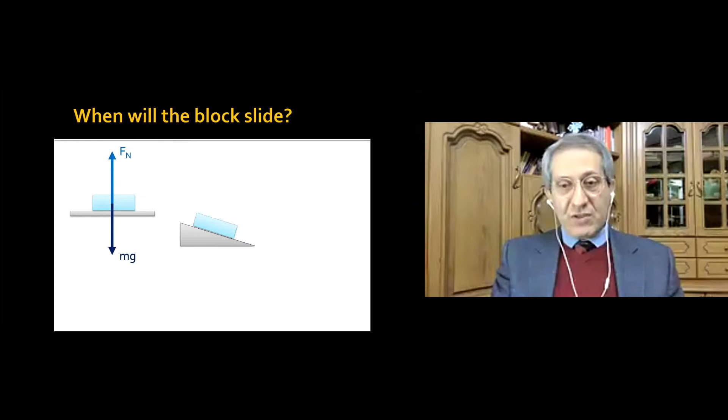If we start to tilt the surface, the force due to gravity will remain in the vertically downward direction. However, the force normal will have to remain perpendicular to the surface. To estimate this force, we resolve the force due to gravity into its components. Although the force normal will consequently become smaller, the parallel component of the force due to gravity will attempt to move the block down the slope. Being opposed by an equal and opposite force, the block remains in equilibrium. This opposing force is the force due to friction.

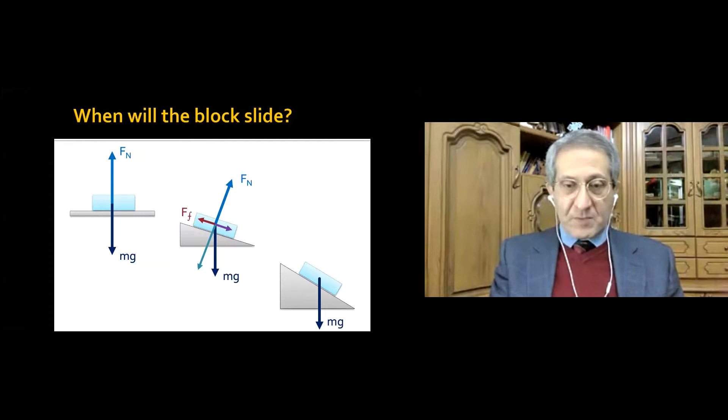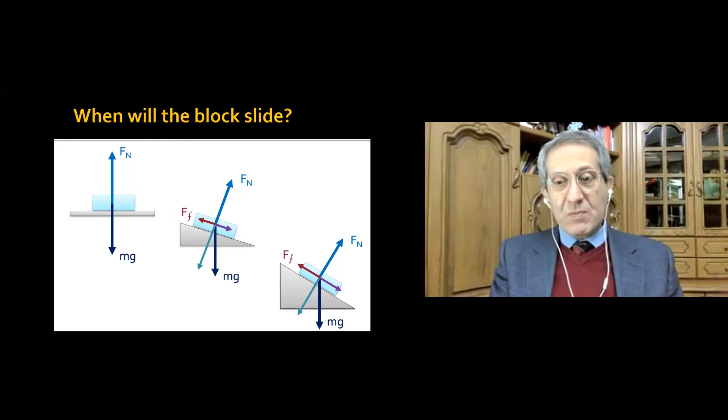The more you tilt the surface, the bigger the parallel component of the force due to gravity becomes, and hence the force due to friction would have to increase in order to keep the block in equilibrium. So, as the parallel component continues to increase, the force of friction will also increase from 0 to a maximum in order to keep the block from moving. There is going to be a point where the force of friction will not be able to resist the moving force, at which point the block will start to slide.

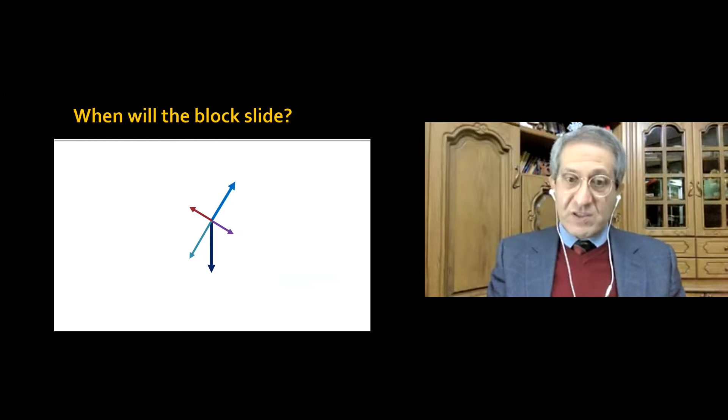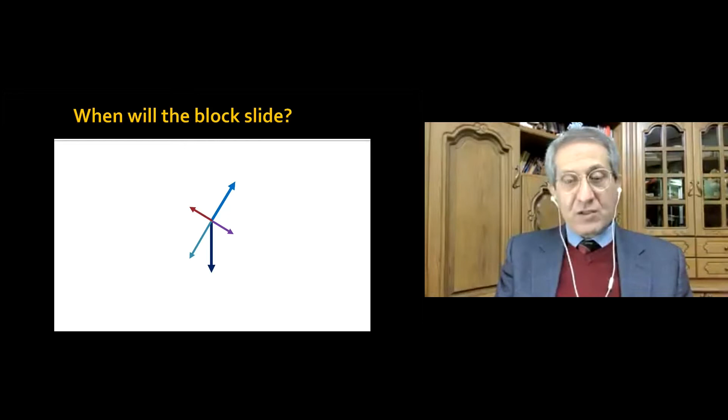It is obvious that the block will start to slide at a larger angle if the surface were rough as wood, for example, compared with a smooth surface such as glass. The force due to friction will obviously depend on the nature of the two interacting surfaces. The heavier the object, the more difficult it would be to move. Friction is therefore a force that resists relative motion between two interacting surfaces, either due to adhesions caused by surface roughness or viscosity of the shearing lubricant film between them.

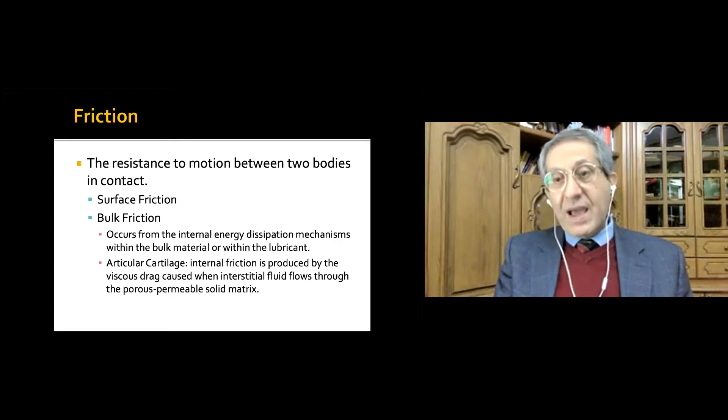There is another type of internal friction which occurs inside a material or structure and is not considered in this lecture. We have seen from the previous example that the force due to friction is proportional to the normal loads on the surface. Friction does not depend on the contact area or sliding speed of the two surfaces. Therefore, the contact area between the surfaces can be increased to reduce the pressure without increasing the friction.

The coefficient of friction, mu, indicates how much force per unit load is required to initiate sliding motion between the two surfaces. It has no units and depends on the roughness of the interacting surfaces. It takes more force to initiate than to continue sliding. Hence, the static coefficient of friction, mu s, is always larger than the dynamic coefficient of friction, mu d.

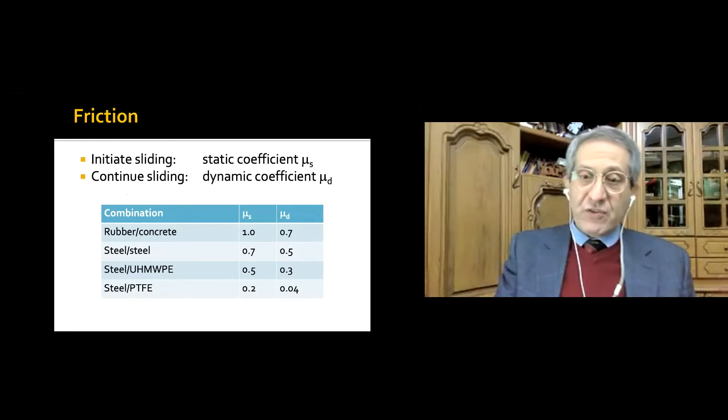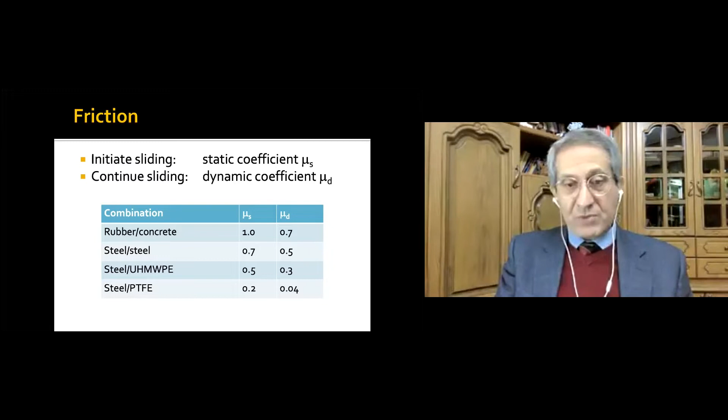The typical examples in the table indicate the coefficients of friction between your car tire and the ground, train wheels and the railway, metal on polyethylene, and metal on Teflon, which is PTFE. Given its low coefficient of friction, it is no wonder that Sir John Charnley chose Teflon to make his early acetabulum cups. The disadvantage of Teflon will be explained later.

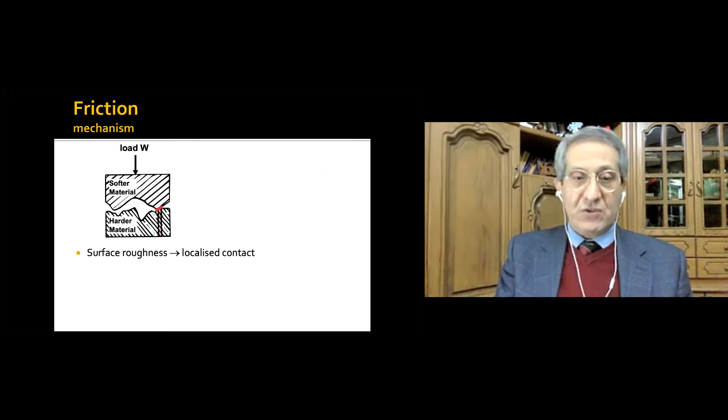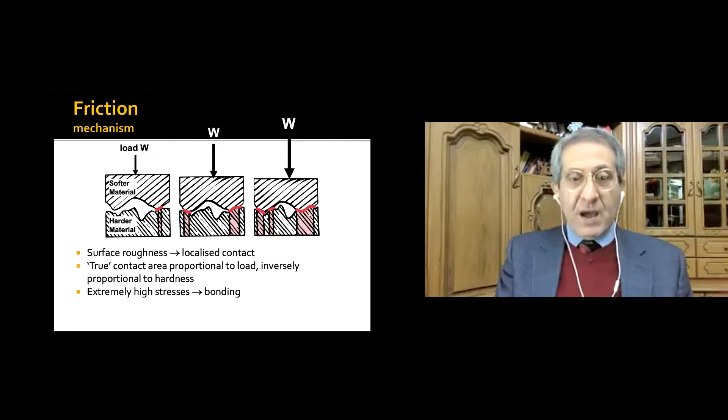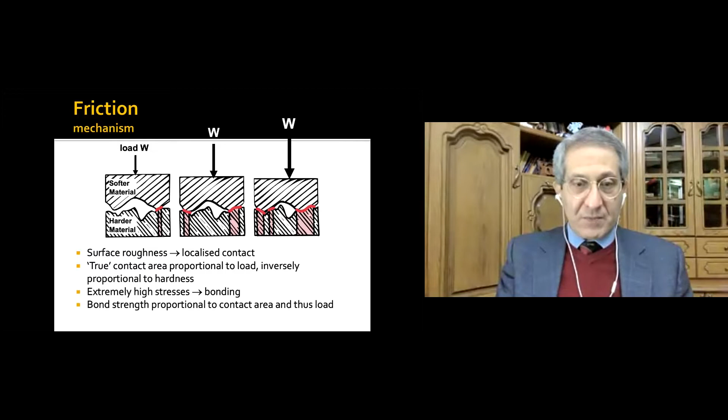Since no surface is perfectly smooth, areas of surface roughness, alternately called asperities, result in localized contact between any interacting surfaces. The true area of contact is therefore proportional to the normal load and inversely proportional to the hardness. Under very high stresses, the summits of the asperities bond together, the bond strength being proportional to the true contact area. Based on what we have learned so far, consider this question.

Assuming a similar combination of interacting blocks and surfaces, which block experiences more friction? Please vote.

We'll leave that for a minute and see how many will get it correctly. Most of you are doing that as we speak now. 50% of participants have voted. Keep them coming. Come on, guys. It's easy. We'll leave it up to a minute, so another 15 seconds. Right, can we show the answers, please?

Yes, that's absolutely brilliant. The block in figure C is obviously larger than the other two blocks. Since all blocks have a similar material, its mass is bigger, hence the normal load, which is proportional to friction, will be larger. Coefficient of friction is the same for any two combinations of materials. The surface area does not affect friction, which depends on the true contact area and hence the normal load.

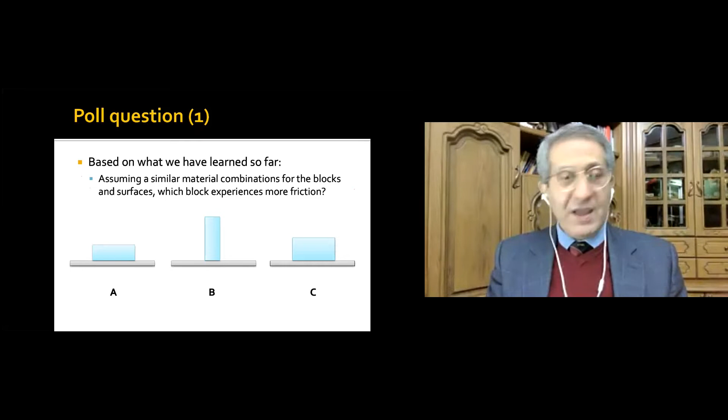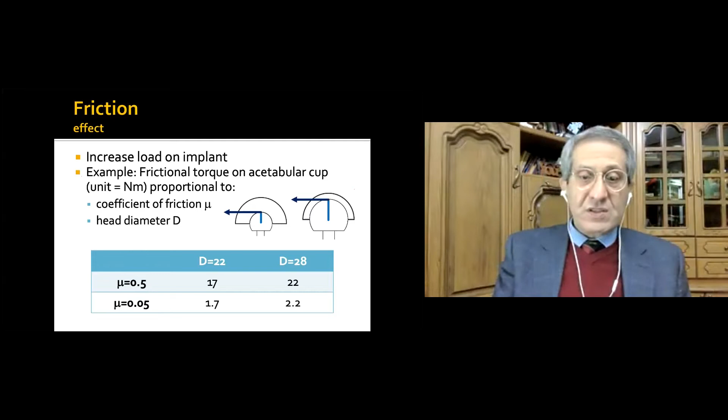In addition to causing wear of the moving surfaces, friction increases the load at the bone implant interface, which might result in loosening. Friction force itself is proportional to normal load on the implant and does not change with different femoral head sizes. On the other hand, frictional torque on the acetabular cup, which is proportional to the coefficient of friction of the articulating surfaces as well as the head diameter, increases with the larger femoral head size.

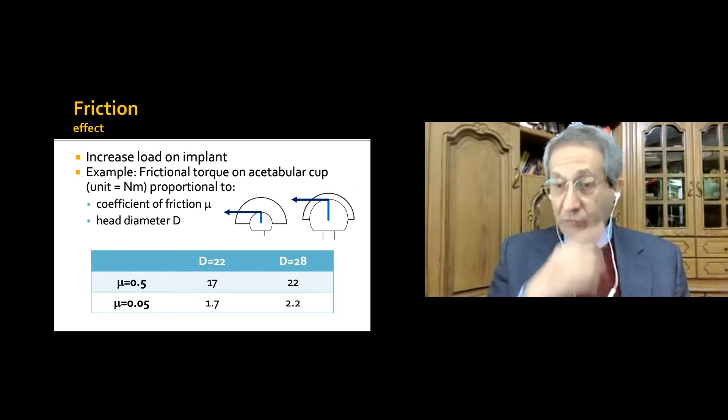Figures in the table show why Sir John Charnley elected to make his femoral heads as small as 22 millimeters. At the bottom row, the advantage of initially selecting Teflon with a very low coefficient of friction in combination with a small femoral head is clear.

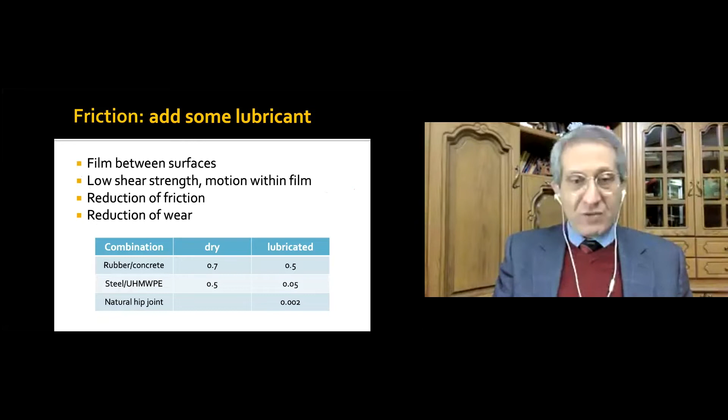We have so far considered the principles of dry friction. The addition of a fluid between the two surfaces with its low shear strength results in motion within the film, hence reducing friction and wear. We have all experienced how the car tires skid on a wet road during rain. Although the coefficient of friction in artificial joints is markedly reduced in the lubricated state, it is still nowhere near that of the natural joint.

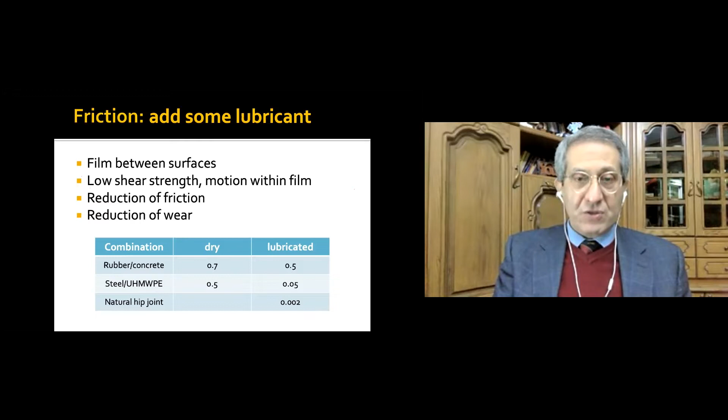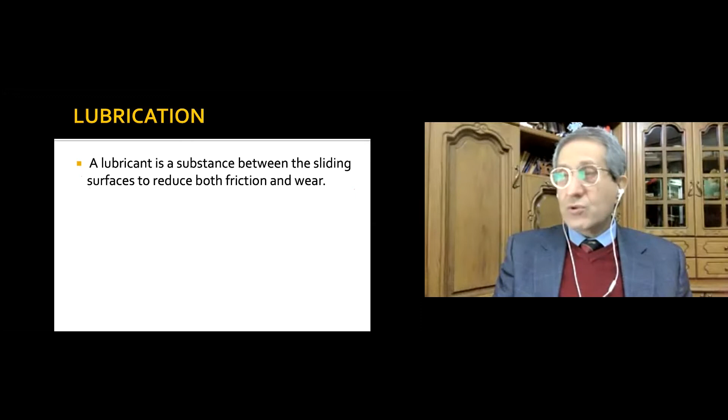This brings us to the topic of lubrication. A lubricant is a substance introduced between the sliding surfaces in order to reduce friction and wear. It could either be a solid, liquid, or gas. Interacting surfaces need to slide relative to each other at a reasonable speed in order to maintain an adequate fluid film. This is much like water skiing.

When the skis are initially stationary, the skier tends to sink in the water under her weight. However, once the boat starts to pick up speed, she is kept floating by the velocity of the boat and the viscosity of the water.

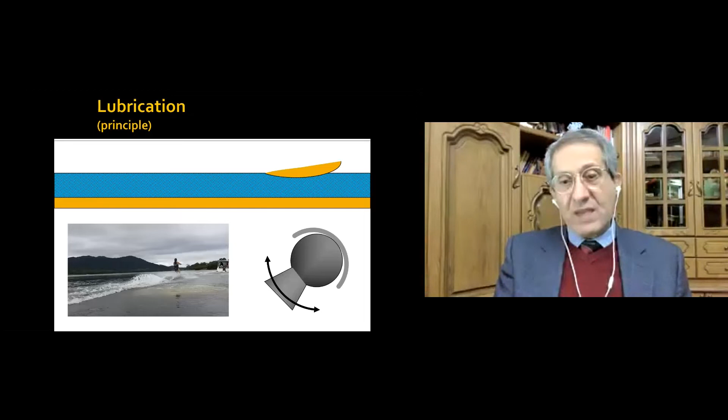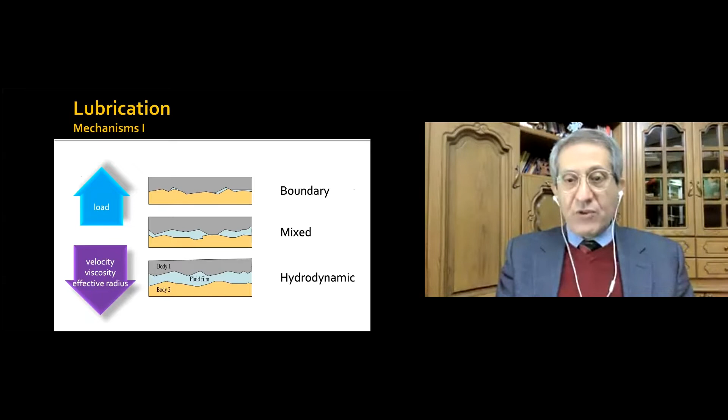The slope of the ski is represented by the clearance between the acetabular cup and the femoral head. At both ends of the spectrum, we have the two surfaces either in contact with each other, being covered only by a very thin film of fluid, or completely separated from each other by an uninterrupted fluid film. Increasing load will shift the conditions towards boundary lubrication, while increasing the velocity of motion, viscosity of the fluid, or effective radius would foster hydrodynamic lubrication.

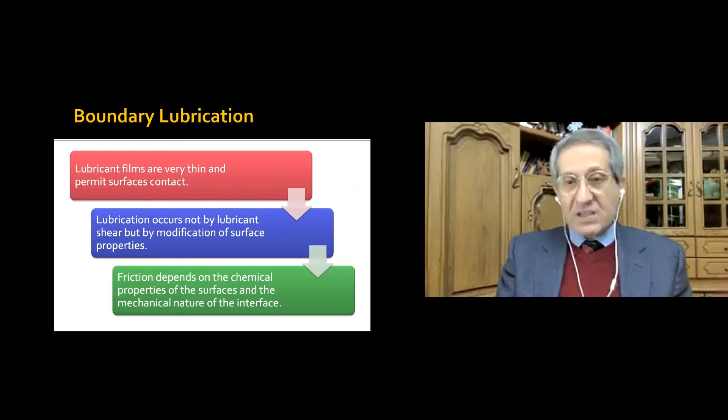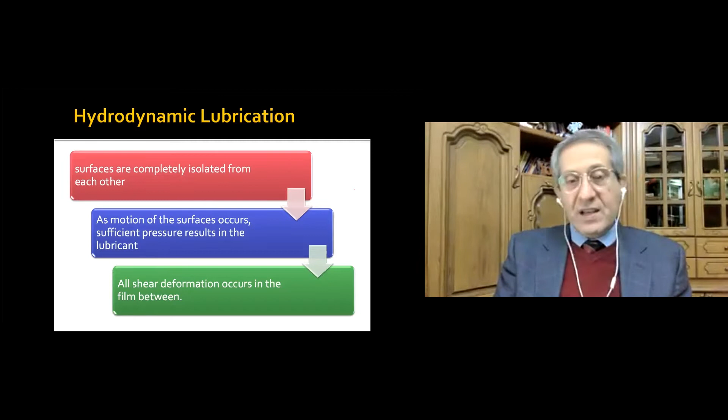When the fluid film between the interacting surfaces is about the same thickness as their surface roughness, asperities on the opposing surfaces get in contact, resulting in a high coefficient of friction. On the other hand, fluid film completely separates the interacting surfaces in hydrodynamic lubrication, such that any motion occurs between the layers of the fluid film.

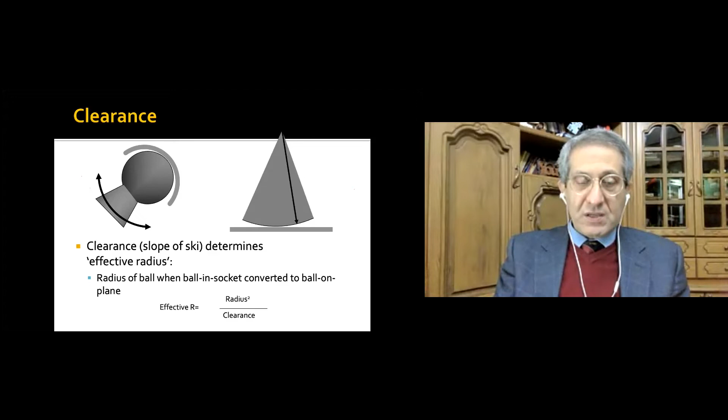The slope of the ski in the water skiing example represents the radial clearance of the implants. This is the degree of mismatch between the radius of the femoral head and the acetabular cup. Clearance determines the effective radius, which in engineering terms is the radius of the ball when the ball in the socket is converted to a ball on plane.

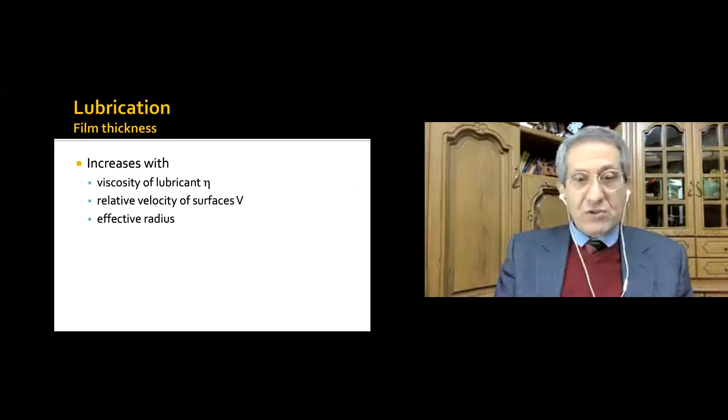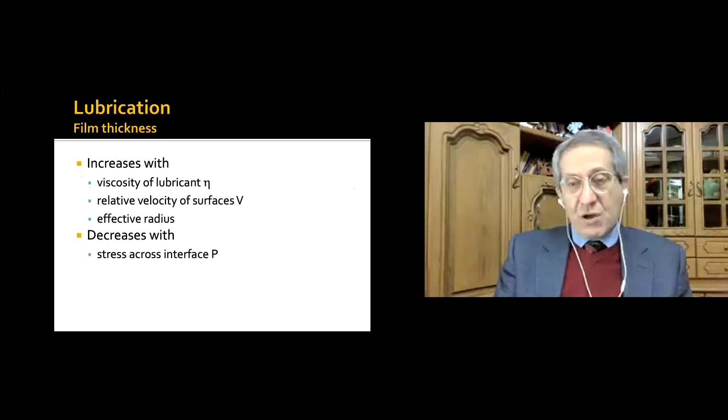The fluid film thickness depends on multiple factors. As in the example of the water ski, it increases with the increase in the viscosity of the lubricant, the relative velocity of the surfaces, and the effective radius. The fluid film thickness decreases with the stress across the interface. Contrary to friction, which is independent of the contact surface area, lubrication of the larger head is much better than that of a smaller femoral head. The above factors describe what is called Sommerfeld number or the film factor.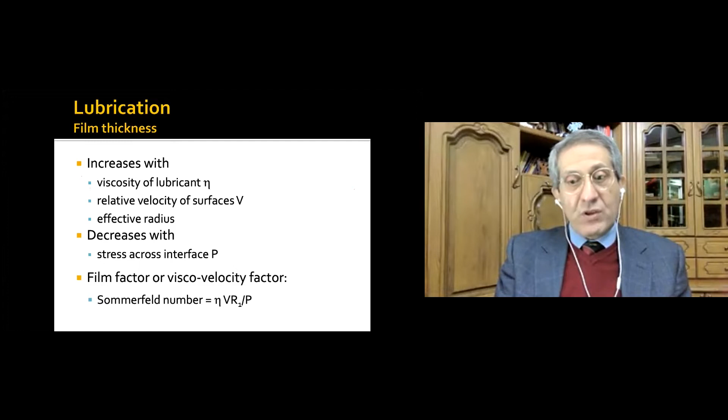Because of the surface roughness of polyethylene, hard-on-soft articulations like metal on poly can only have boundary lubrication. Hard-on-hard articulations, on the other hand, experience mixed and fluid film hydrodynamic lubrication.

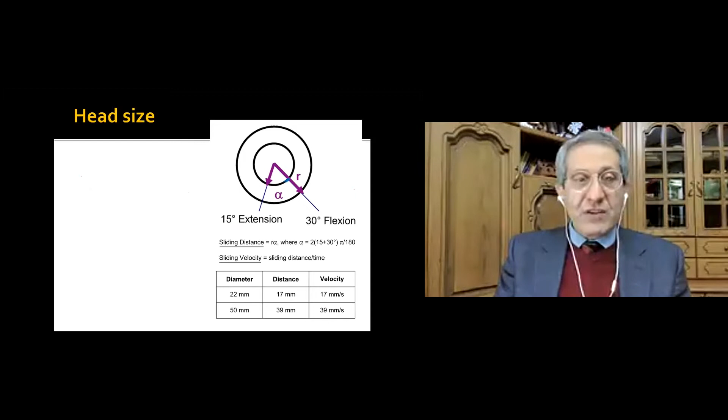In order to move from 30 degrees of flexion to 15 degrees of extension, a small femoral head would have to travel a short distance to cover its 45 degrees angle. A larger femoral head, in contrast, would have a larger sliding distance to cover in the same range of motion in the same time. Although the larger head has an advantage in terms of better stability and range of motion, because of the larger sliding distance, it also has an increased wear rate.

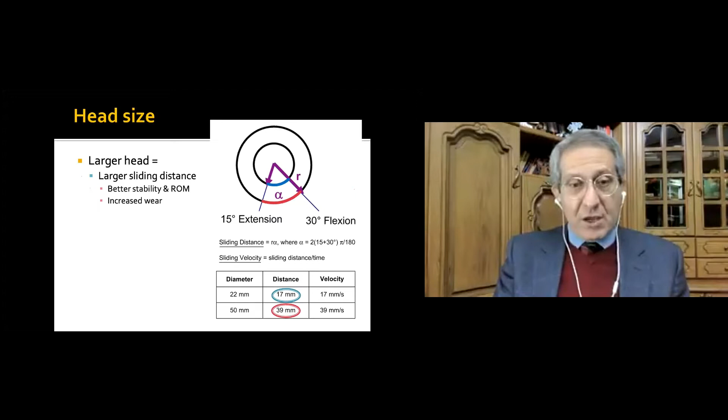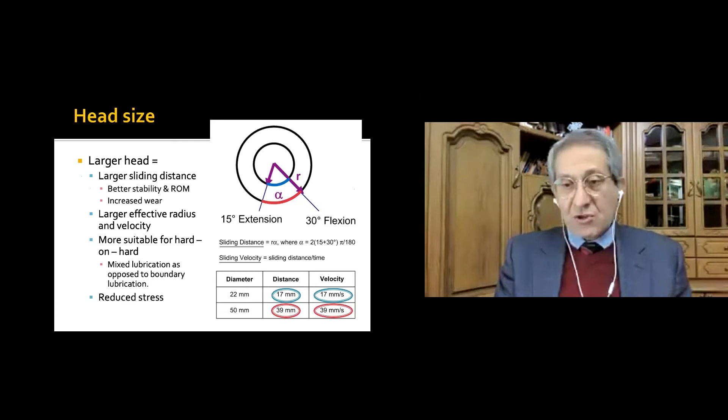On the other hand, because of the larger effective radius and high velocity, the larger femoral heads are more suitable for hard-on-hard articulations where mixed and fluid film lubrication occurs. This advantage is not experienced by the hard-on-soft articulations, which can only be lubricated by boundary lubrication. Another advantage of the larger heads is the reduction of stress due to a larger area of contact, thus enhancing fluid film thickness.

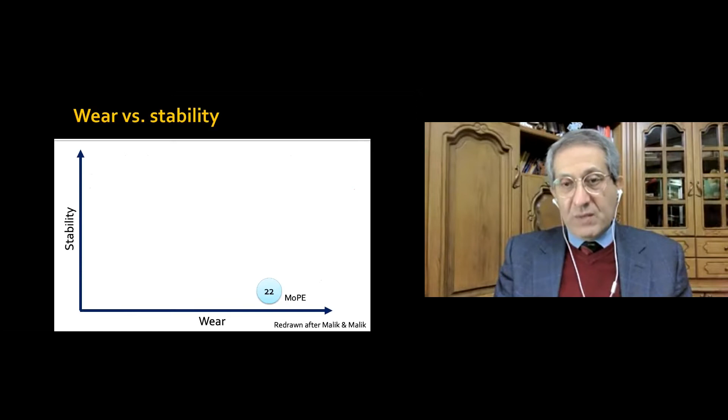The initial combination Sir John Charnley used, a 22 millimeter head with metal on polyethylene articulation, resulted in high wear and less stability. Increasing the head size to 28 millimeters increased the stability at the expense of wear. Changing the articulation into highly cross-linked polyethylene has definitely reduced wear rate. Increasing the head size to 36 millimeters proved to be a reasonable compromise. On the other hand, hard-on-hard articulations have shown reduced rate of wear. Using a larger head in this type of articulation definitely increases the stability without affecting wear very much.

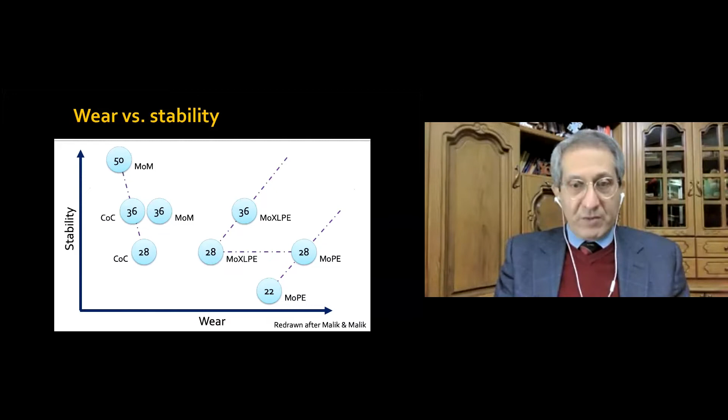With our knowledge about lubrication so far, I would like you to think as to which mechanism was related to failure and device recall in the case of the ASR hip resurfacing. Please vote.

Right, it's taking a little bit of thinking this time. And a fair share between the options. Keep them coming, guys. We're now half time.

I'm glad I had brought this question. Right, another 5 seconds, and we'll stop the poll and share the results. It's an even share between options. Let's explain the question a little bit at a time. The correct answer is B.

The ASR acetabular cup had an inside groove against which a surgeon pressed a tool to implant the component. The groove limited the surface area inside the cup. As a result, the ball was more likely to strike the cup's edge, causing wear and generating metallic debris. This was particularly prone to occur when the cup had a more open inclination.

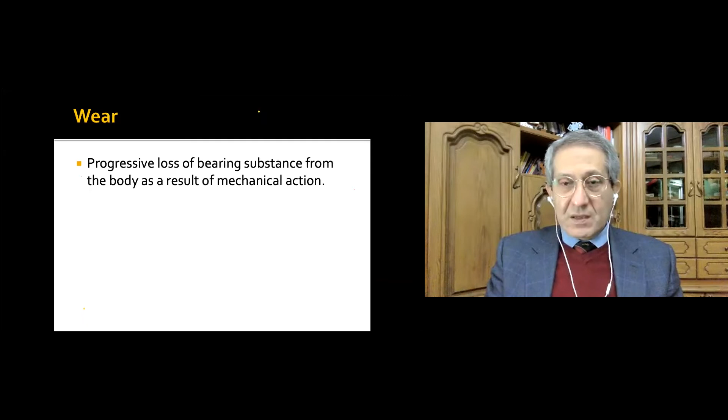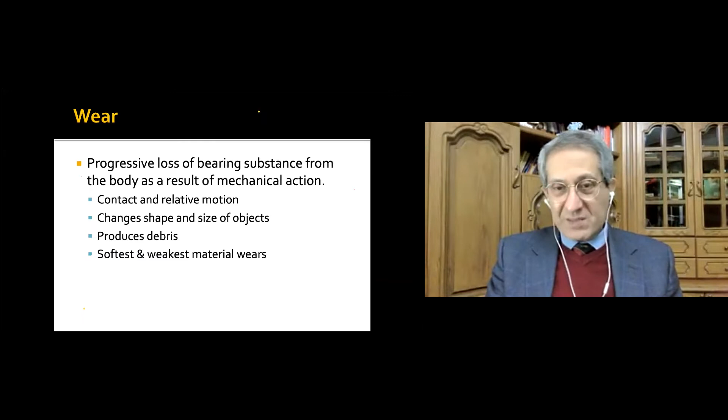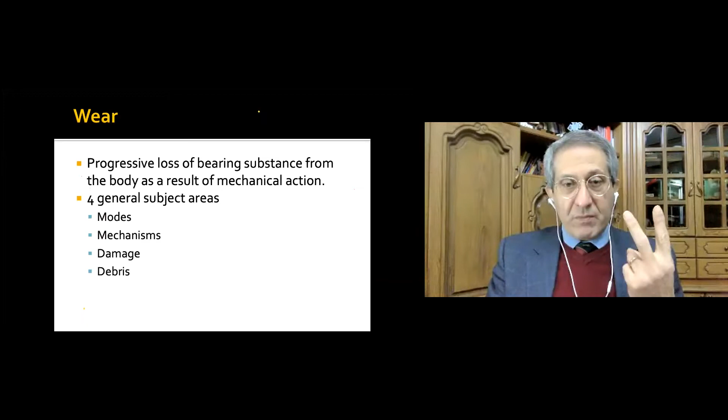That brings us to the discussion on the topic of wear. Wear is the progressive loss of material as a result of relative motion between articulating bodies. It results in a change in the shape and size of the objects and produces wear debris. As in the program Weakest Link, it is the softest and weakest material that usually suffers the most. There are four general subject areas in relation to wear: wear modes, wear mechanisms, wear damage, and wear debris.

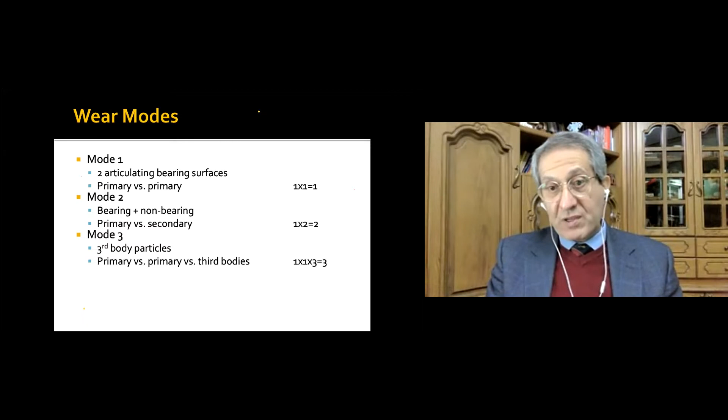In mode 1, wear occurs between two primary articulating surfaces. Remember, primary versus primary is 1 times 1 and is equal to wear mode number 1. In mode 2 wear, a bearing and a non-bearing surface are rubbing against each other. Mode 3 occurs as a result of third body particles, and mode 4 occurs between two non-articulating surfaces. Remember, secondary versus secondary, which is 2 times 2 equals 4.

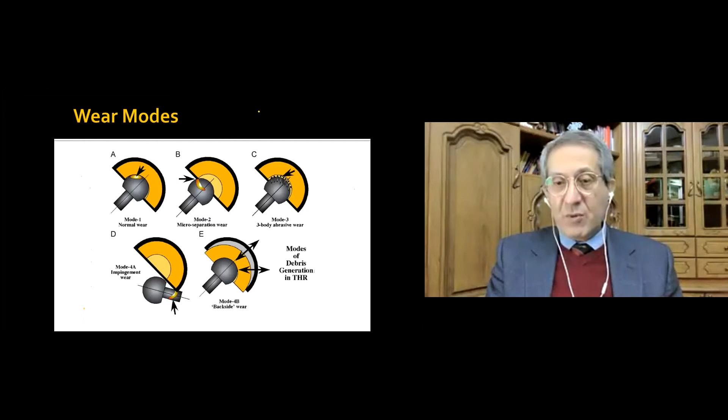Examples include mode 1 normal wear that occurs between the femoral head and the acetabular liner. Mode 2 is represented by microseparation and stripe wear between the femoral head and the non-articular edge of the acetabular liner. Mode 3 is the third body abrasive wear, abrasive wear, and mode 4 here represented by impingement between the femoral neck and the edge of the cup, or the backside wear between the liner and the shell.

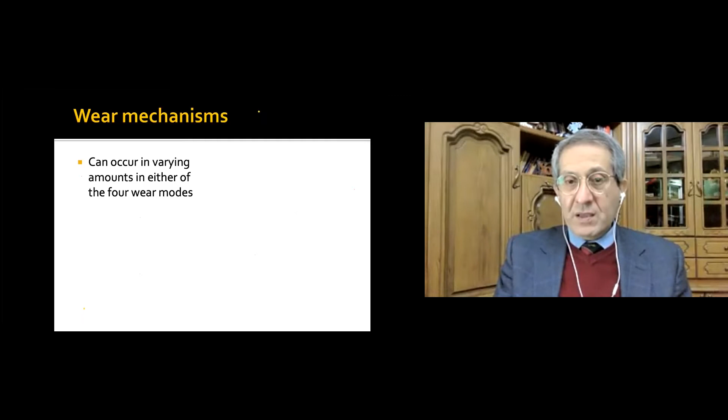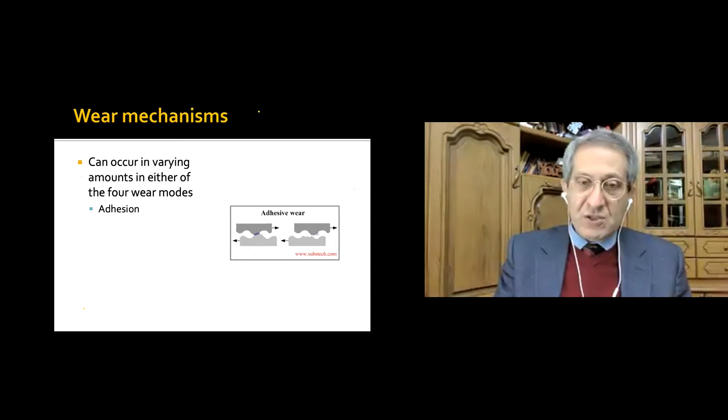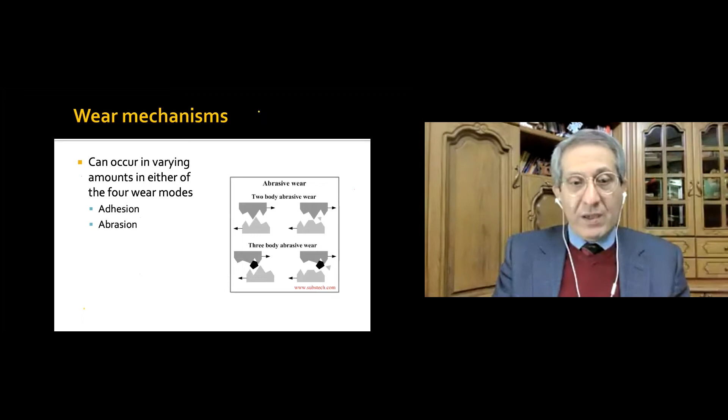The previous wear modes can occur because of any combination of the following mechanisms. Adhesive wear results from the formation of spot welds between the two surfaces with subsequent breakage of the transfer film, resulting in third body particles. Abrasive wear is like using sandpaper, where asperities on the harder surface cause plowing of the softer one. Fatigue wear results in subsurface cracks, which eventually communicate, causing delamination.

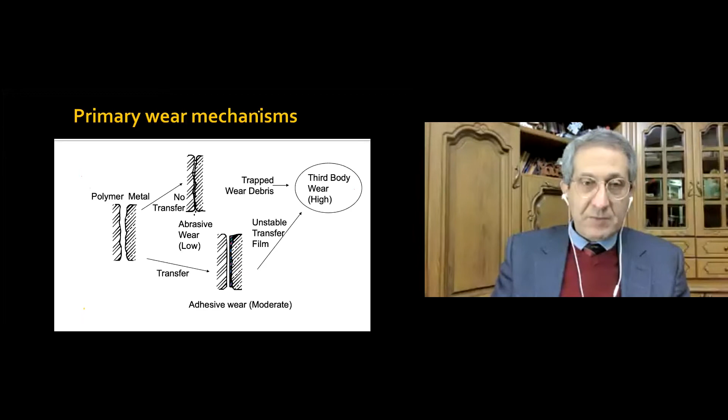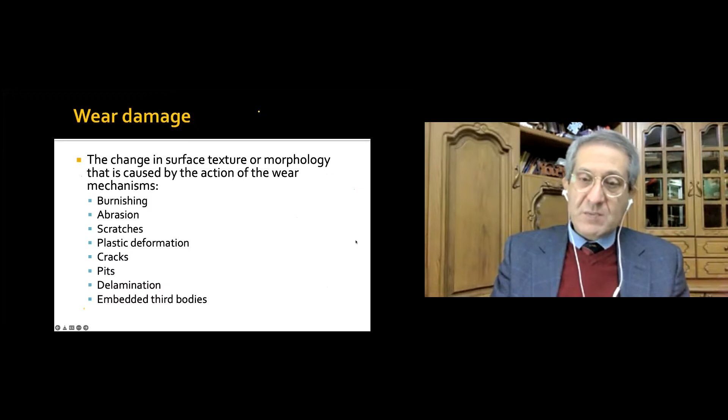Thus, the primary wear mechanisms can either result from low-rate abrasive wear, which does not involve transfer of material from one surface to the other, adhesive moderate-rate wear, which results in transfer of material from the softer surface to the harder one, or high-rate third body wear. Adding corrosive wear to any of the three mechanical wear mechanisms results in marked acceleration of the process. The above mechanisms result in change in texture or the shape of the implant. The resultant damage has been expressed by a long list of descriptive terms.

Wear generates billions of particles which initiate biological reaction. Local effects depend on the size and number of particles, either macrophage activation leading to granuloma formation or lymphocytic reaction resulting in pseudotumors. The smaller metal ions could escape into the systemic circulation, resulting in carcinogenesis or teratogenicity.

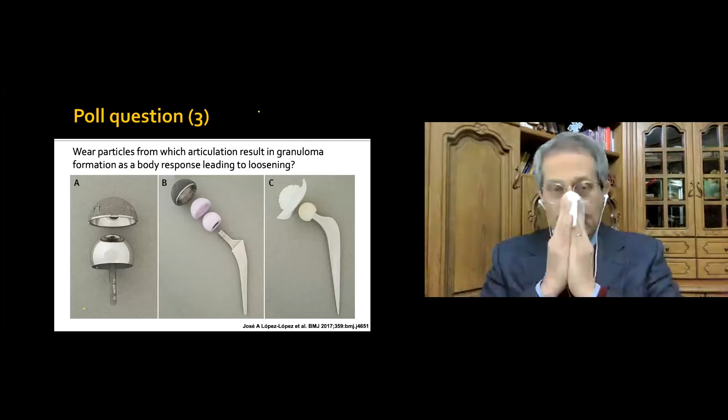Here is another poll question. In which articulation do wear particles result in granuloma formation as a body response, leading to osteolysis? Please vote. Another 30 seconds, sorry. Keep the votes coming. So granuloma as in macrophage activation rather than lymphocytic reaction, which occurs with a certain kind of articulation. I'm trying to make it easier. That's the effect of prompting in the exam. Right, another second. Okay, now we'll stop sharing and share the results.

Now, I'm disappointed a little bit with this result. Indeed, the correct answer is C, where the polyethylene particles are known to cause macrophage activation and granuloma formation with osteolysis. Metal-on-metal articulation in figure A usually results in lesions such as pseudotumor, ALVAL, or ARMD, while ceramic-on-ceramic articulations are biologically inert.

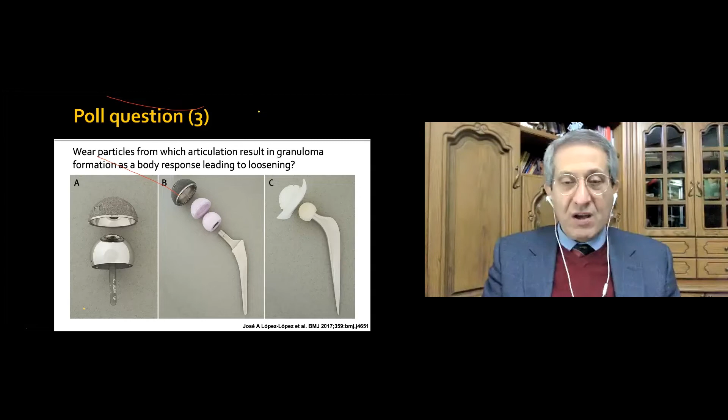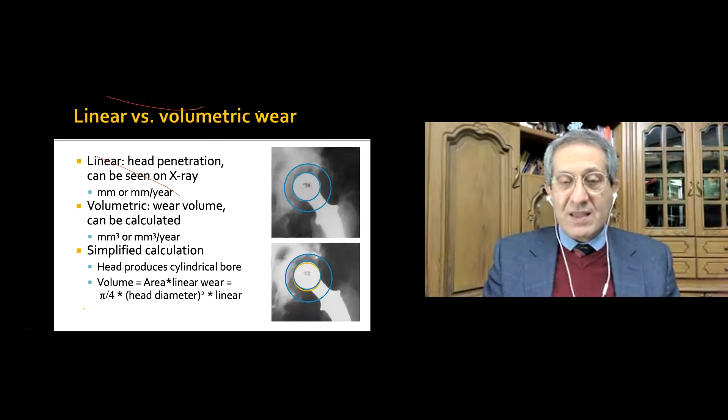Linear wear can be measured on X-ray or other special techniques by head penetration in millimeters or millimeters per year. Volumetric wear is measured or calculated in cubic millimeters or cubic millimeters per year using a simplified equation, assuming that the head produces a cylindrical bore.

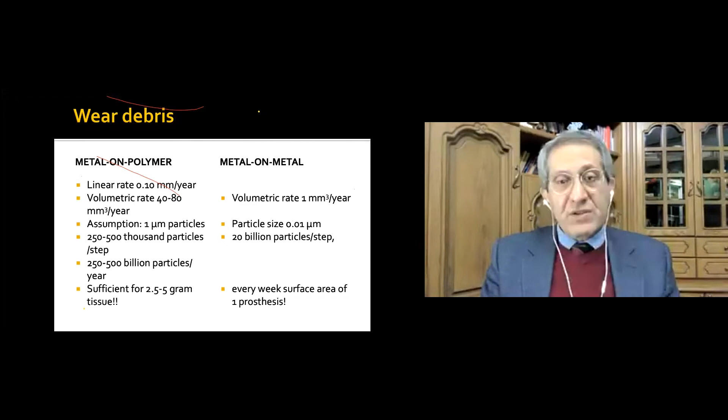Many of you will be familiar with this illustration, which shows how much wear volume is produced by different combinations of bearing surfaces. It is, however, the size and number of particles which determines the biological effect of the wear debris. Although the volumetric wear is much less in metal-on-metal articulations, particle size is much smaller, sub-micron, resulting in billions of particles being produced with each step.

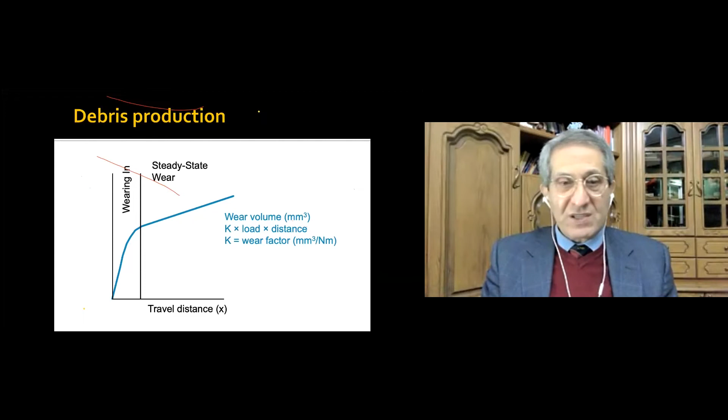Debris production is initially accelerated in the initial wearing-in phase. However, it later reduces and reaches a steady state. Wear volume is directly proportionate to the normal load, and not the stresses, and the sliding distance that the articulating surfaces experience. It is inversely proportionate to the hardness of the softer component.

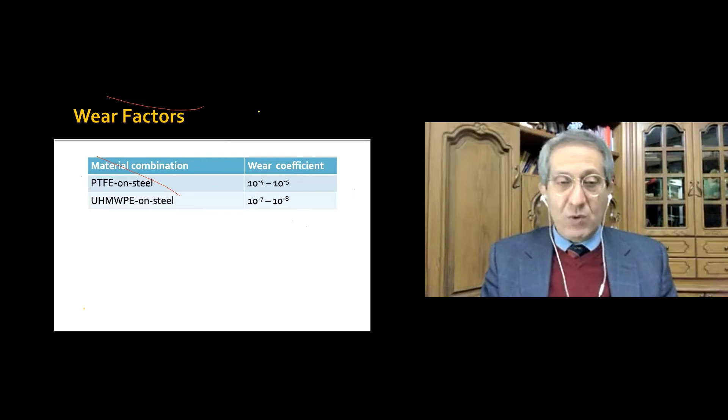Using this information, one can calculate a unitless wear coefficient as well as a more specific wear factor. This is where the disadvantage of Teflon becomes clear. Its wear coefficient is far above that of metal on polyethylene. This explains Charnley's decision to move from Teflon cups to polyethylene ones, which we nowadays use. Ceramic-on-ceramic articulations are by far the best ones at present in terms of wear factor.

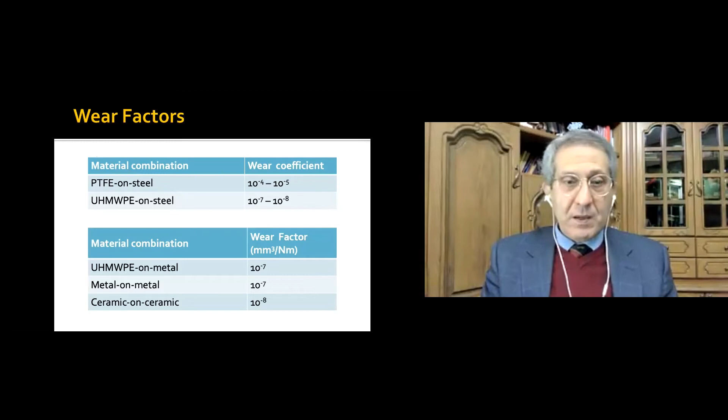In order to reduce wear with its inherent problems, one could either improve the existing material, for example, reducing oxidation of polyethylene by remelting or annealing, or increasing its cross-linking by high-dose or sequential radiation. Ceramics have evolved from zirconia, which has largely been replaced by alumina and delta ceramics.

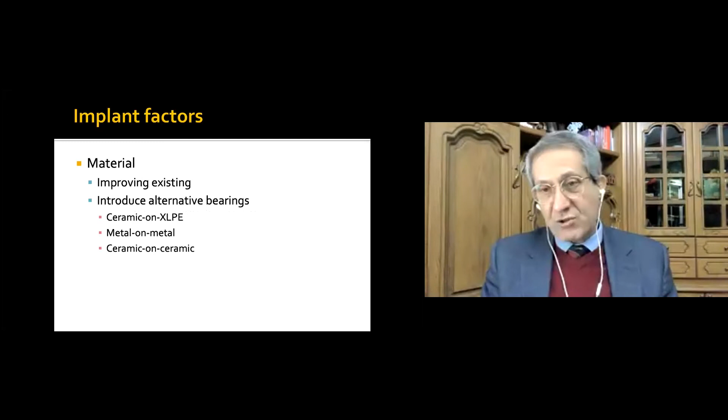Another approach is to introduce alternative bearings, such as ceramic on highly cross-linked polyethylene, metal on metal, or ceramic on ceramic. Tailoring the implant geometry to the type of articulation and its lubrication, and improving the radial clearance will result in reduction of wear.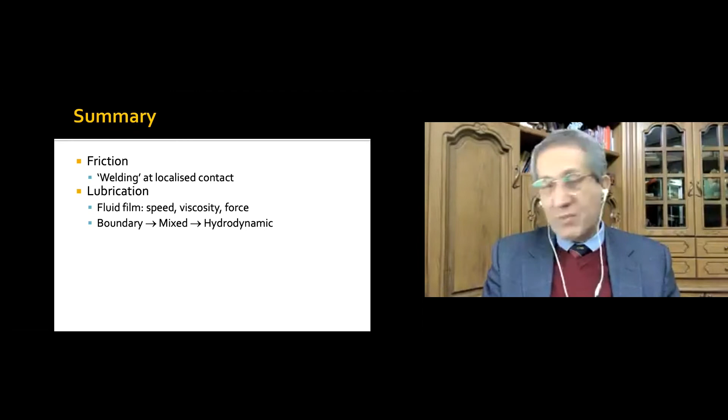So in summary, ladies and gentlemen, friction results from interactions at the contact points. The thickness of the fluid film determines the type of lubrication and is determined by the speed, viscosity, and force applied to the articulation. We also discussed wear mechanisms and the local and systemic effects of wear debris.

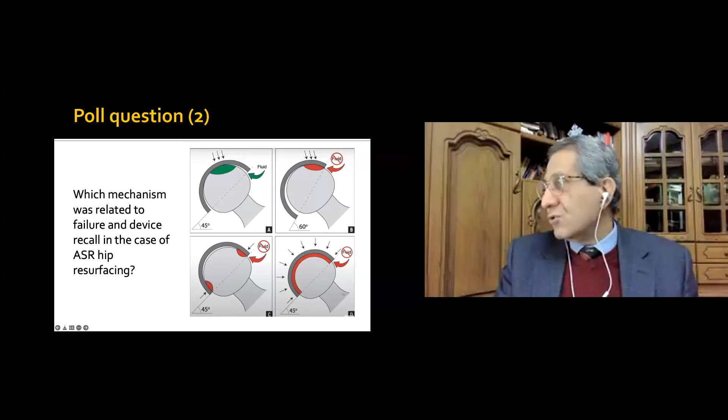And we have said that this is measured in engineering terms with the effective radius or the clearance. So you always have to have a slight mismatch between the head and the cup itself. If you have exactly the same radius, this would be similar to figure D. In figure D, the cup and the head have exactly the same radius of curvature, which means that there is no fluid film. They get stuck together and they will not move.

Similarly, if the head is larger than the cup, then it would be jammed at the edges, which is what we call equatorial bearing, that is figure C. So at the equators, you'll have contact. There is a space in the bottom of the articulation, but because of contact at the equators, there is no movement and no fluid film.

The best tolerance is when you have the status in figure A, where there is a slight space or slight mismatch between the head and the cup, and the cup is bearing at the bottom of the articulation, which is called polar bearing. So fluid can get access, and as you start moving, even the polar bearing, which starts off as boundary lubrication, will be converted to a fluid film as you increase the velocity of movement of the cup.

What happened in the ASR cup is they manufactured the cup with less than 180 degrees of coverage. And this coverage was reduced further by a groove inside where you can apply the tool or the impactor for the cup. So the effective surface which is available for the head to articulate with was reduced. So this would lead to edge bearing.

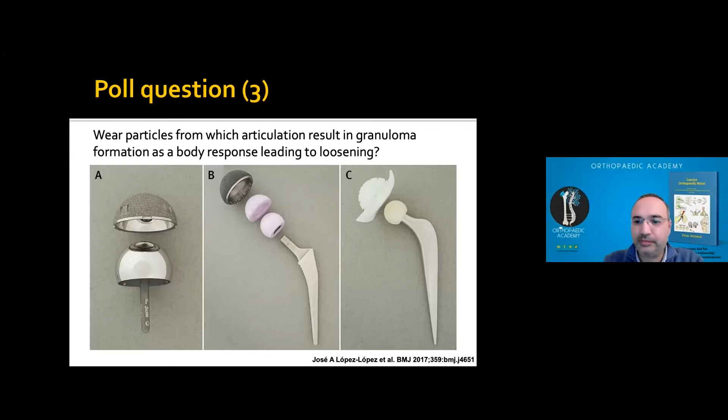How is the reaction between metal on poly different from metal on metal? Remember that the size of the particles is bigger in metal on poly than metal on metal. The particles in metal on poly are 1 micrometer particles, while those in metal on metal are 0.01 micrometer. Consequently, there are so many more of them in metal on metal compared with metal on poly. But it's not the number of particles only, it is the size of them.

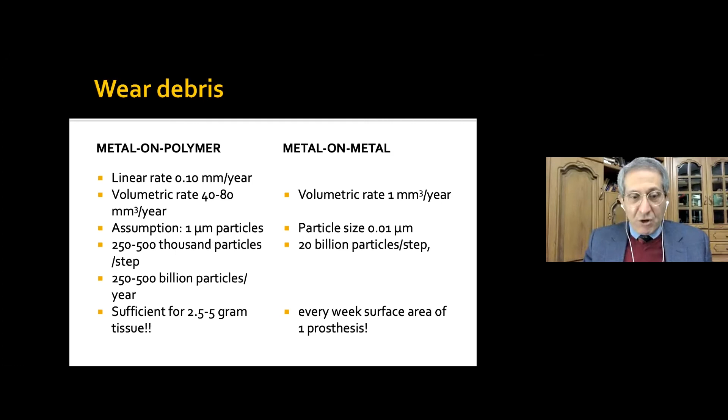The larger ones, the 1 micron particles resulting from metal on poly articulation, are engulfed by macrophages. And macrophages cause granuloma formation. They release cytokines and cause osteolysis. While the smaller particles, the submicron particles of metal on metal, are effectively metal ions, and they do not get engulfed by macrophages. They initiate a lymphocytic reaction.

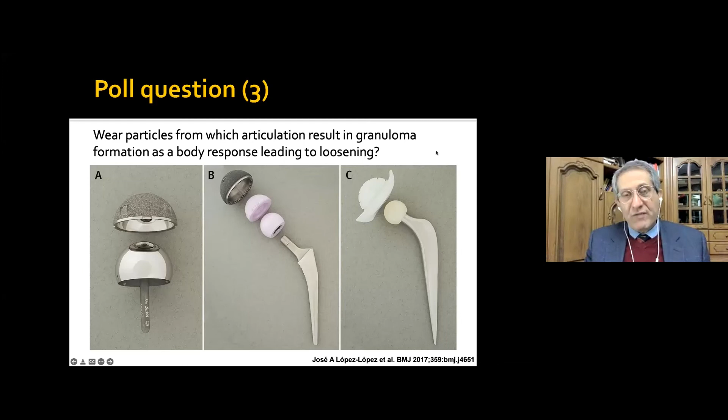And this lymphocytic reaction, which is called ALVAL, or adverse reaction to metal debris, is what causes the pseudotumors, and they start destroying the local tissues. It also goes into the circulation, and there is concern about carcinogenicity and teratogenicity. So the size of the particles, and which cells respond, macrophages or lymphocytes, determines the local reaction.

Brilliant. That's a wonderful answer, Prof. I think that was a very good question from Bilal as well, trying to clarify this. So I hope you got that. I think I definitely did. That's clear: the size of the particle, and then that attracts different cell types. So that's very well explained.

I think these are very, very complex concepts. It's very difficult to get them 100% right, even if you've done a PhD in engineering. And how to apply them to orthopedics is also complex. So try to simplify these and try to understand the different types of lubrication. Lubrication in natural joints is different from lubrication in artificial joints. I think that's very poorly explained in many books where they mix them up. You just need to understand that the types of lubrication in natural joints are completely different from artificial joints, guys.

Okay. The natural joint, because of the weeping. Absolutely. Absolutely. They're completely separate. A lot of people mix between them.

Yeah, and thanks, Carl. It's adverse reaction to metal debris. Exactly. Jishan, thank you. So all these terms as well, ALVAL, ARD, ARMD, pseudotumors. We get asked about them a lot, what exactly the difference is between them. And I think for the FRCS exam, you don't have to worry. There could be a difference, but they're almost the same. There could be a tiny histological difference, and you'd have to be at the top of pathology analysis.